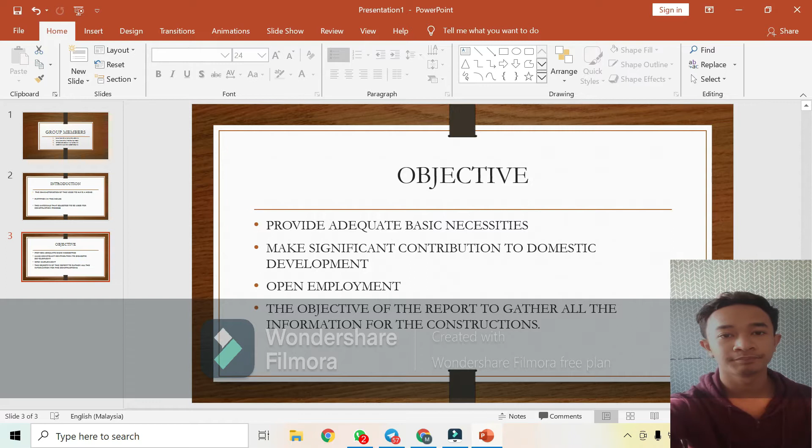For the bricks, we have chosen burnt red clay bricks because this type of brick is the most common, it is the most inexpensive, and it is environmentally friendly. Our reason for using these bricks is because it is widely used, widely available, and it will make the overall cost of the bungalow more affordable.

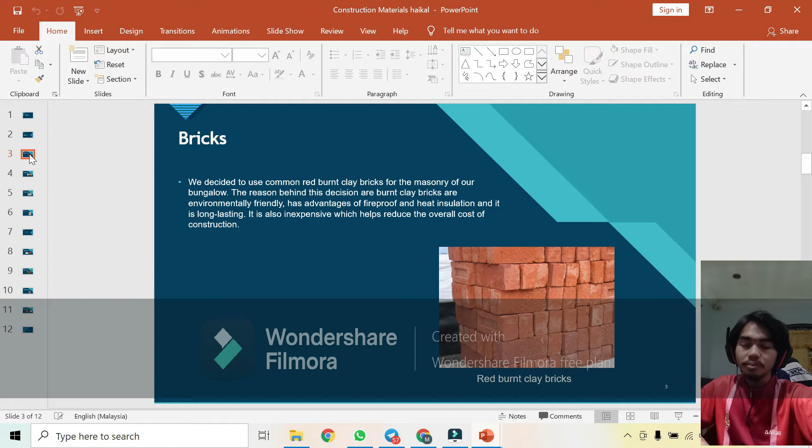For the framework of the bungalow, we will use timber, we will use wood because it is non-toxic, it is rust resistant, it doesn't rust like steel, and it is easy to install. It is easy to install, and it will reduce labor costs.

By 'easy to install', I forgot to mention that we will use not just any wood but engineered wood. Engineered wood is a type of wood that has been engineered and modified to be easier to install. It has its own specification and it will make the labor work easier.

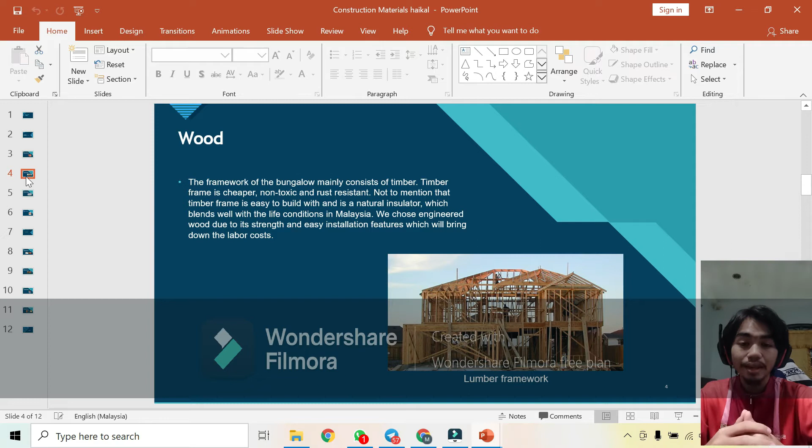For the third one, we will use concrete for the foundation of the bungalow. This is because concrete is very strong and we need the foundation of the bungalow to be very strong.

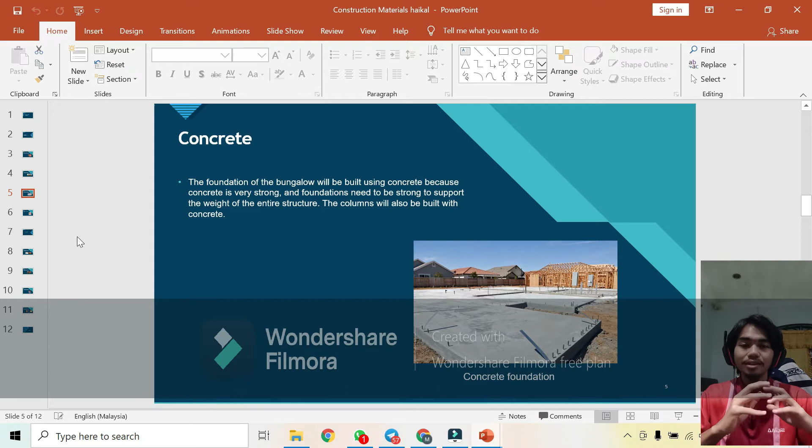For the last one, we will use ordinary Portland cement for two reasons: firstly, to make mortar to bind the bricks together, and secondly, to finish the wall to make everything look smooth and beautiful. So that's all for the fundamental construction materials, and now we move to other materials.

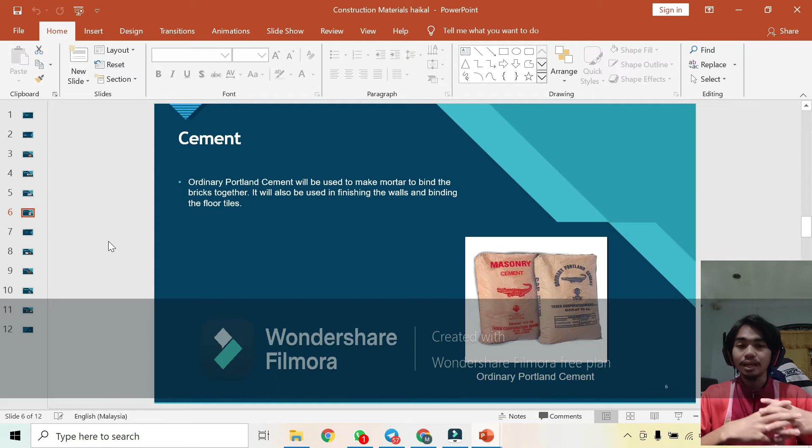By other materials, I mean the essential parts of the house, like the door. So firstly, we will go through the flooring.

In this bungalow we will have two types of flooring. Firstly, ceramic flooring, which we will use in the bathroom, kitchen, outdoors, the porch, or the balcony, because ceramic flooring doesn't absorb water. It is waterproof, and it suits the room it is installed in.

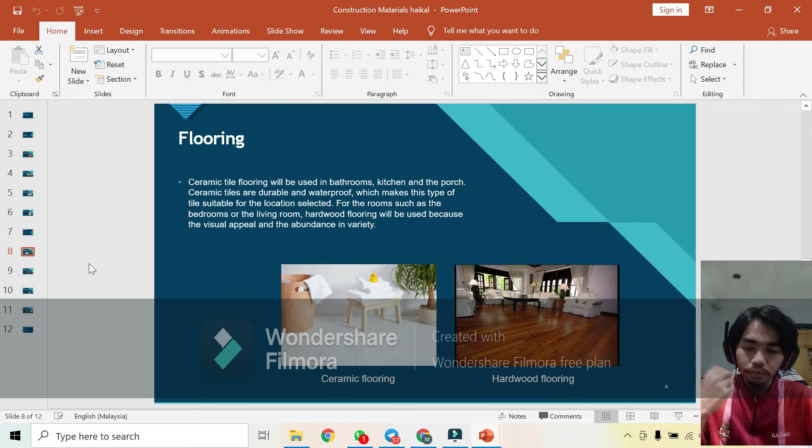For the second type of flooring, we will use hardwood flooring. We as a group chose hardwood flooring because of the aesthetics, and it has an abundance in variety, so we can mix and match and get a different result in each room while still using the same materials, giving an aesthetically pleasing interior.

For the roofing, we will use clay roof tiles, because clay roof tile is one of the most common roofing types in Malaysia. It is easily obtainable, has immunity to insect and rot damage, and has low maintenance. It is also environmentally friendly because clay insulates heat, and it is suitable for the lifestyle of nations that are very hot at some times.

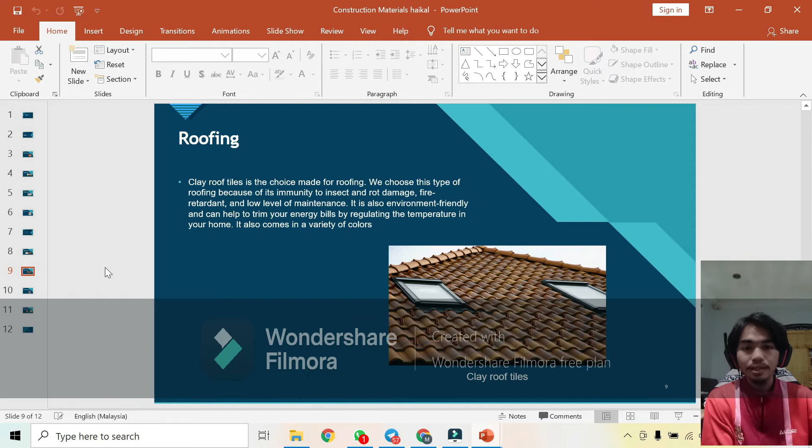At the peak of the day, it will be very hot, reaching 30 or more Celsius, and it surprisingly comes in a variety of colors.

If you're looking at the slide right now, we can see a rather uncommon color. In Malaysia, for me at least, I always saw red clay roof tiles, but in this slide it is a rather unusual color for me.

So let me move to the next. For the windows, we will use casement windows. This is rather common in Malaysia, and we think these windows are suitable for the bungalow, showing the simpleness but still maintaining the luxury. It justifies the price of the bungalow, to say the least.

Finally, for the door, we thought and discussed much about this. For the entry door, which is the front door at the outside of the house, used to enter the house, we decided to use a teak door, made of teak wood.

Teak wood in Malay is kayu jati. We decided to use this because of its high density. It is resistant to water, temperature change, termite, and wood rot. Teak door is also aesthetically pleasing, and not to say anything, but it is expensive, and it will increase the value of the bungalow.

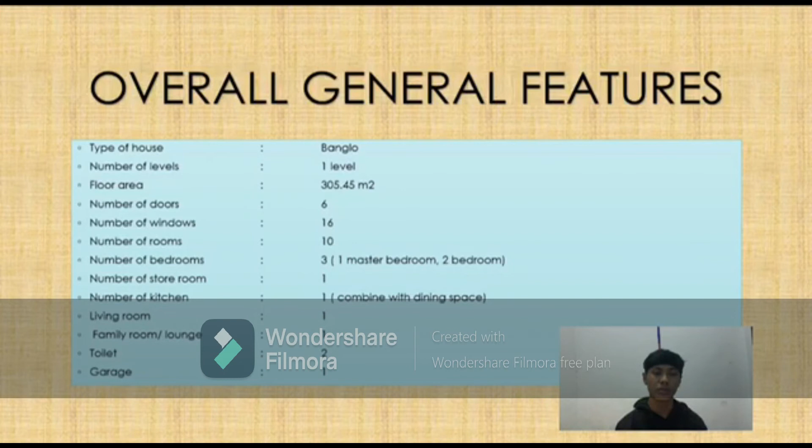For the living room, the area is about 29.24 meters square, with 3 sofas - though the owner can create his own amount of sofa as he or she wants - 1 table, 1 door, 1 window, a ceiling fan, and about 4 lamps. For the kitchen, the area is about 17.338 meters square, with 1 sink, 1 door, 1 dining table, 1 window, 1 smoke exhaust fan, lamps, and 1 cabinet set.

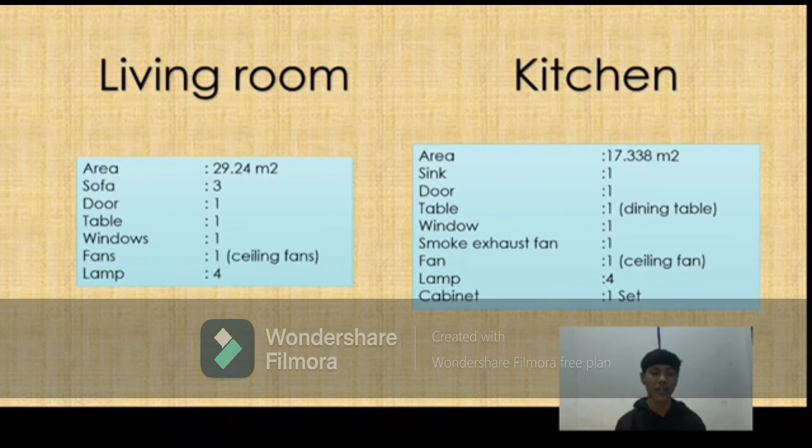For the master bedroom, the area is about 31.4 meters square. We have 1 bed, 1 door, 3 windows, 1 air conditioner, 3 lamps, 1 closet, and 1 toilet.

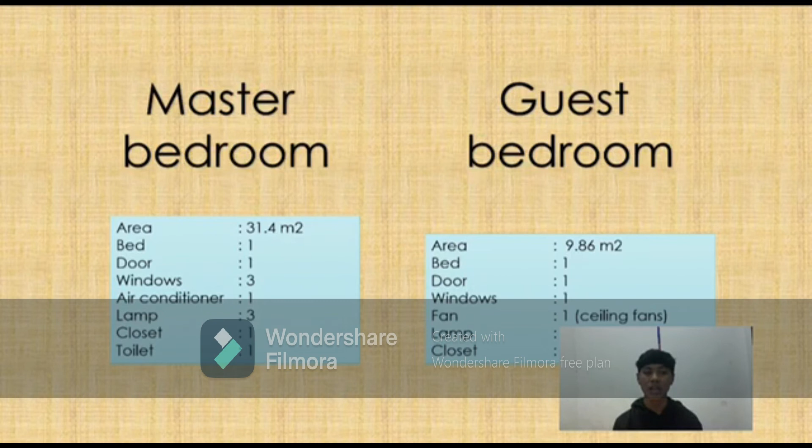For the guest bedroom and the other bedroom, the area is 9.86 meters square. We have 1 bed, 1 door, 1 window, 1 ceiling fan, 2 lamps, and 1 closet.

For the family room, also known as the lounge, the area is about 26.84 meters square. We have 3 sofas, 1 door, 1 table, 2 windows, 1 ceiling fan, and 2 lamps.

For the toilets, we have 2. The first toilet, in the master bedroom, has a fairly wide area of 12.73 meters square, with 1 sink, 1 bathtub, and 1 lamp.

The second toilet has an area of about 3.84 meters square, with 1 sink, no window, and 1 lamp.

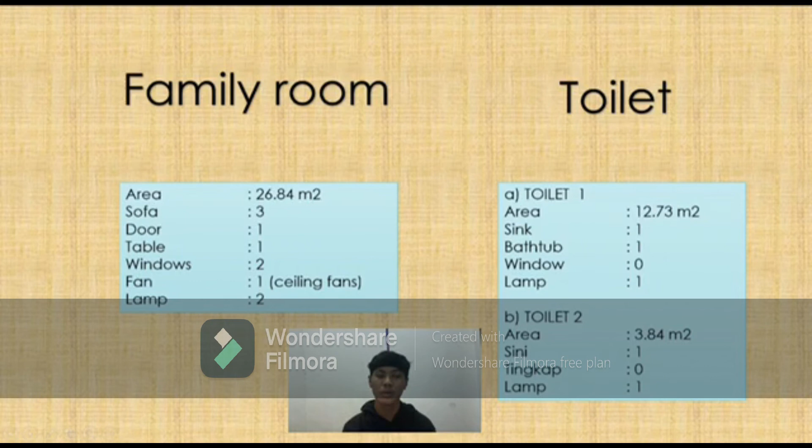For other spaces like the storeroom, garage, and porch: the storeroom has an area of about 1.4 meters square, with 1 door and 1 lamp. The garage has an area of 34.81 meters square, with 1 door and 1 lamp. The porch has an area of about 18.2 meters square, with 1 door and 2 lamps.

The garage is big enough that we can put a car and a motorcycle in it.

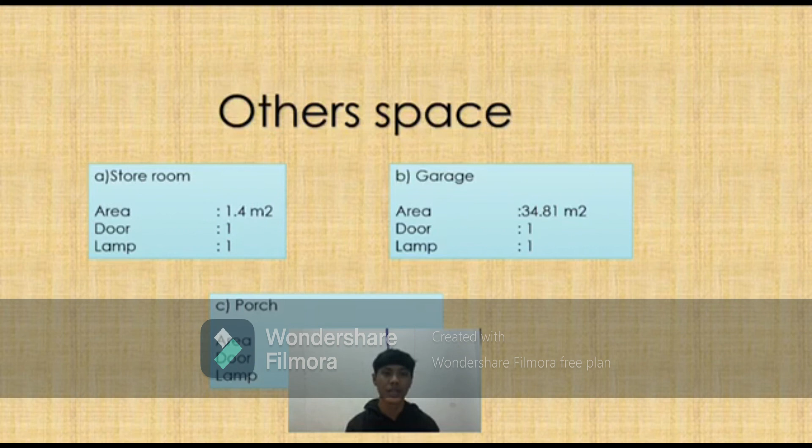In conclusion, if we want to work in the technical field, especially engineering and architecture, it's important for us to master the skill of engineering drawing using AutoCAD software. This is because the drawing we produce needs to be neat and detailed so that the information contained in it can be conveyed accurately. With this, it can also make it easier for us to choose the right material as well as the right size in building a building.

Therefore, anyone who wants to further their study in the field of engineering must master the skill of engineering drawing using AutoCAD software. Doing drawings through this software can make it easier for engineering students or anyone to draw drawings that are much more difficult than usual. Engineering drawings produced through AutoCAD software have higher and more precise measurement accuracy. In addition, drawings produced from AutoCAD software are easier to understand than manual drawings.